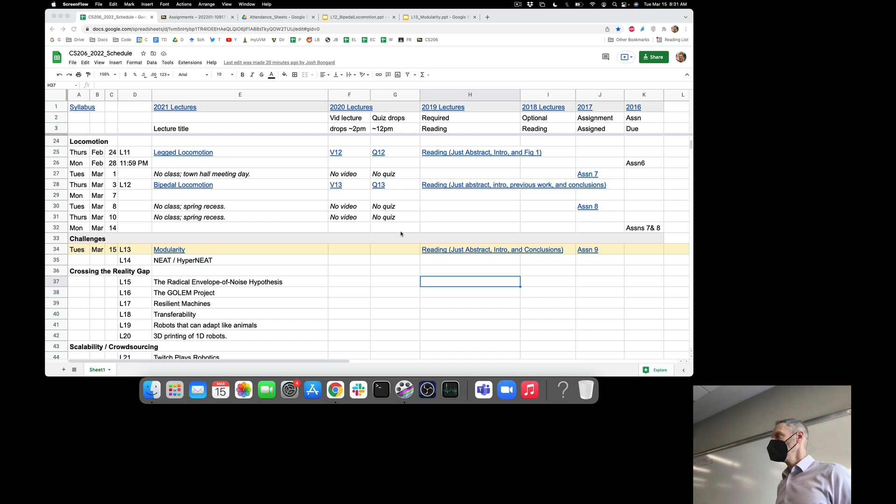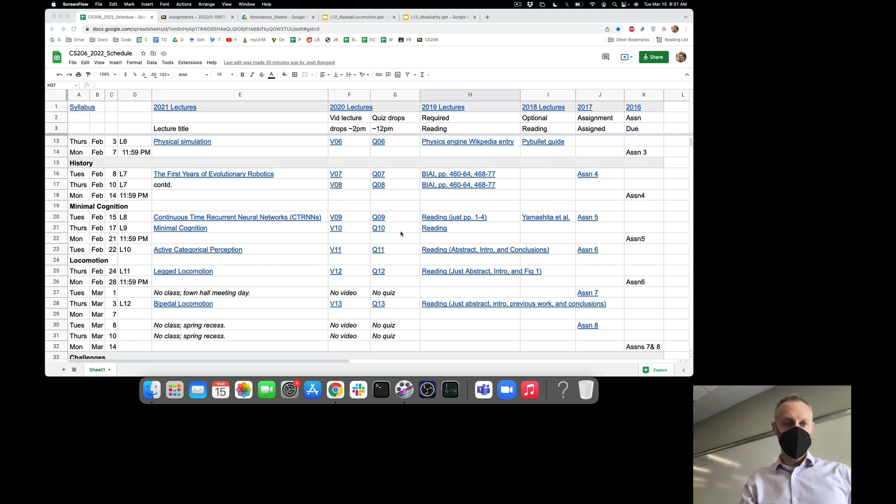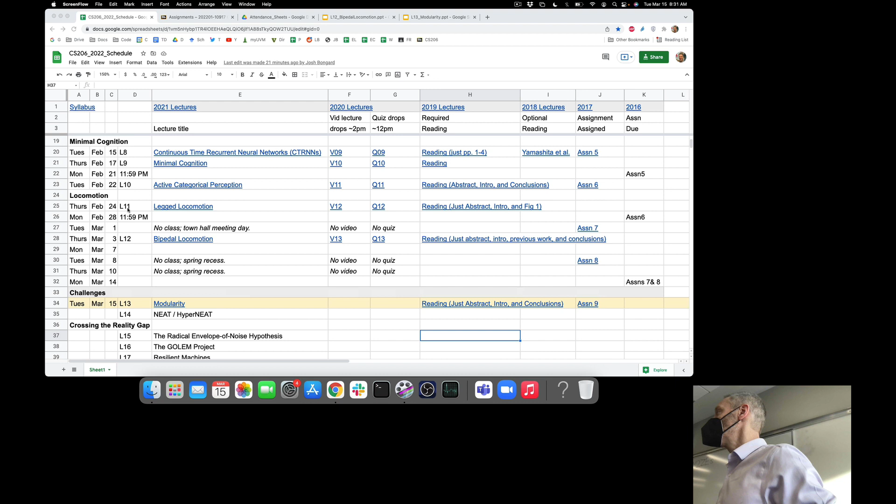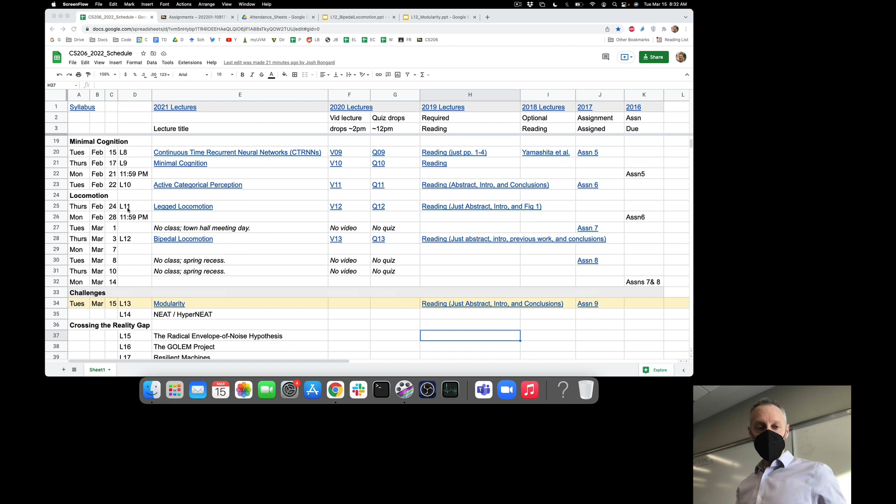We're working our way through, and we're going to finish today our history of evolutionary robotics, admittedly a short history. We've been talking about locomotion, because at least in the animal kingdom, the origins of intelligence are deeply entwined with movement. We talked about Linus's question about why don't plants have brains. Not that plants aren't intelligent, but whatever it is they're doing, they don't seem to need brains because most plants don't need to get from point A to point B. So we're looking at this connection between locomotion and intelligence. We're going to finish that up today, and then move on to where the field is today, and look at some of the major challenges in the field.

One of the nice things about learning about and working in a relatively young field is there are wide open questions, big challenges that no one has a good satisfactory answer to. We will look at some answers that some researchers, myself included, have tried to come up with to address some of the major challenges in creating autonomous and adaptive machines.

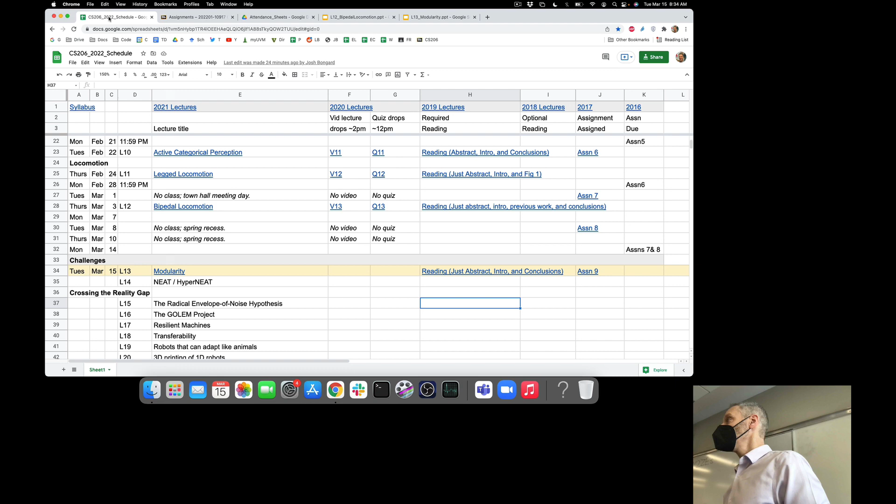All good? Okay, so back to lecture 12, where we're talking about our particular form of bipedal locomotion. Us humans, thanks to evolution, have struck a very extreme trade-off between displacement, energetics, robustness, and balance. It takes us quite a while to figure out the balance part — 2 or 3 years at the outset of life to figure out the balance part of bipedal locomotion. But once we get that figured out, the benefit is what?

We're also not the fastest animals out there. We take a hit in terms of stability and displacement, but we make up for it with energy efficiency. So we started last time by talking about the most energy efficient form of locomotion out there, which is passive dynamic locomotion. We started talking about this experiment last time where the investigators evolved the body of a passive dynamic walker to walk down a decline with basically infinite energy efficiency — no motors, no electronics, no sensors, nothing.

It's kind of hard to see from this picture here, the decline, but if I go back and forth between these two images, you'll see in a moment that there are two phases to this experiment. In phase one, they evolve passive dynamic walking down a decline, and then in phase two, they're going to continue evolution.

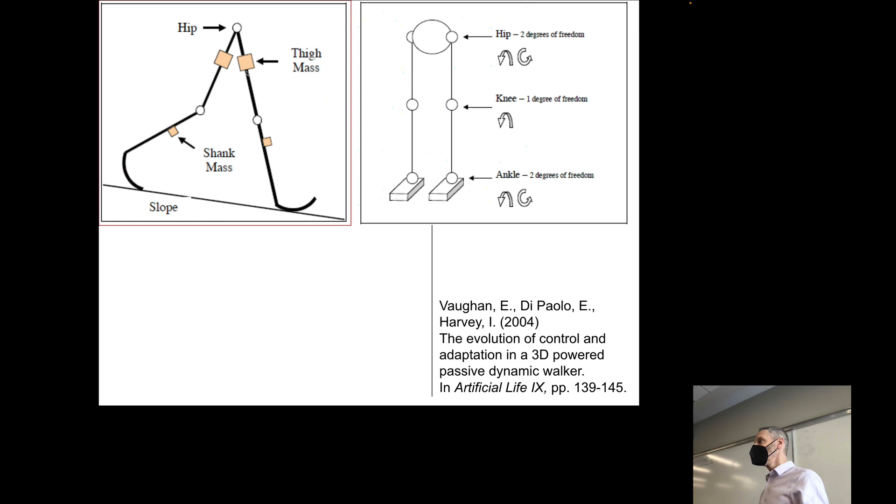In the passive dynamic walker, these are 10 joints but 0 motorized joints, no motors yet. They are going to add on some masses to the robot's body, and evolution is going to play with the position and size of these masses to change the mass distribution of the robot's body. There are masses on the thighs, the shank, the foot, and the hip.

There are some other aspects of the robot's body, in addition to the position and size of these masses, that they're going to subject to the evolutionary algorithm, like the length of the legs, the length of the feet, the radius of the waist, and so on.

The last aspect of the body they're going to evolve is some springs, and I think this is where we ended last time. We spent a little time talking about springs. The simplest way to model a spring is with just 2 numbers: the stiffness of that spring, which you can think of as the thickness of the steel coil, and then damping, which is how much or how little the spring will return to its rest length after you've stopped pulling and pushing on it. Here are my little cartoons of what springs with high stiffness high damping, low stiffness high damping, high stiffness no damping, and low stiffness no damping look like.

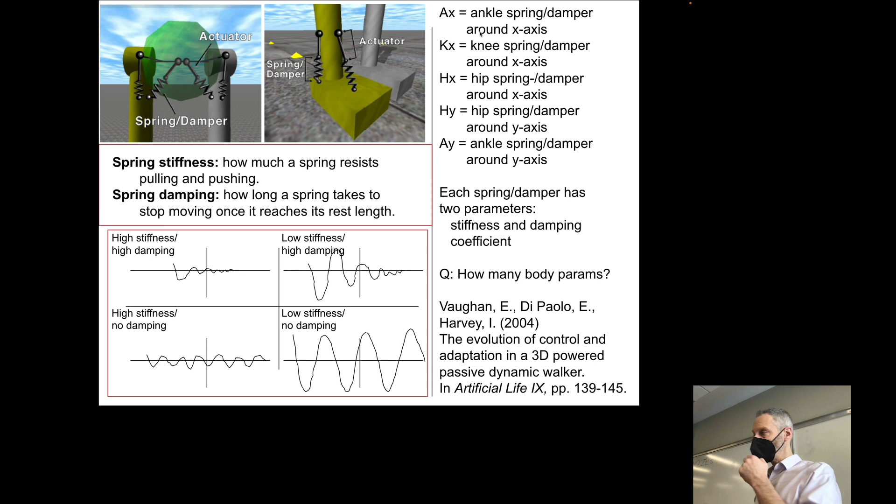We've got 5 springs on each leg: 2 springs at the ankle, 2 springs at the hip, and a 5th spring, not shown here, in the knee.

Okay, so those are all the parameters that we're going to take and put together in a vector and hand that vector over to the evolutionary algorithm. At the moment, your hill climber is evolving a vector that contains numbers, those numbers are synaptic weights. In this case, we have a vector of numbers again, but they're body parameters. How many body parameters are we evolving in total? What's the length of that vector? How many numbers do we have here that we're going to include in this vector?

Not quite. We've got 5 springs, 10 right? So we have the stiffness and damping for each spring, a total of 10 numbers. I forgot to mention, hopefully it's obvious, they're going to assume that this robot is bilaterally symmetric. So whatever the stiffness and damping is for the 2 springs on the left side of the hip, it's the same thing for the right side of the hip. Everything on the left side of the robot's body is the same as everything on the right-hand side. So we've got a total of 10 numbers here. How many numbers do we have here?

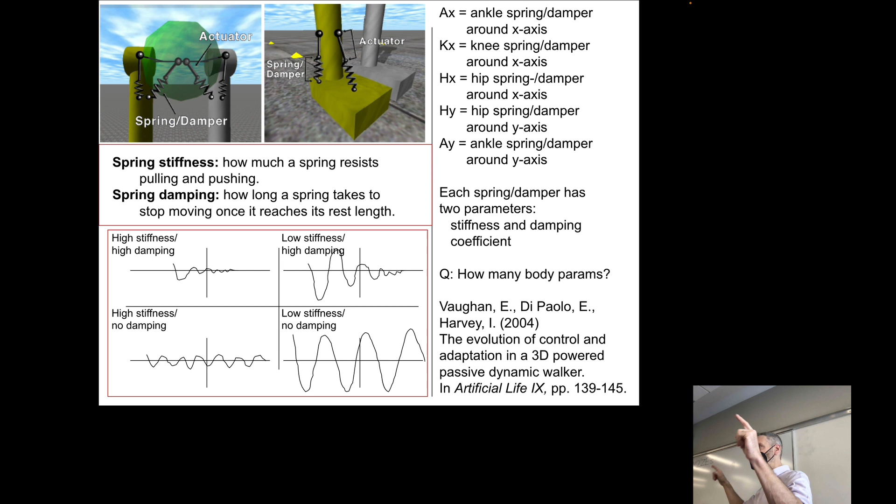12, right? So we've got these 12 body parameters plus these 10 body parameters. So we're going to see in a moment an evolutionary algorithm that's evolving populations of vectors of length 22. Body parameters, no brain yet. So far, so good? Okay.

Okay, there is a little bit of a brain here. There's a little bit of a twist. As we go on through this experiment, we move to hybrid dynamic walking. The robot is gradually going to be controlled more and more by this neural network. It's a bit of a hairball here, but we'll try and untangle it. We're back to working with a continuous time neural network. You'll notice there's no R here.

There are no recurrent connections here. Although now I see some recurrent connections. Okay, maybe it's a CTRNN. Doesn't matter for our purposes.

We've got 5 motors, which we'll see in the second phase. These 5 motors are not attached to the joints, they're attached to the springs. This is actually more biologically realistic than attaching the motors directly to the joints. How so? What biological detail are they folding in by taking motors, connecting them to springs, and springs are pulling on links here, not joints?

Think about your own anatomy. What's the biological detail here? Springs act like muscles, whereas the body acts like the bones. Close. So the body, obviously, the links are the bones. The muscles, the motors, as always, are muscles. What are the springs here? Like ligaments or tendons. Tendons and ligaments, right? Exactly. So your muscles don't pull directly, most of the time they don't pull directly on bone. They pull on springy cartilage, which is tendons or cartilage, which is exactly what gives you part of your energy efficiency, right? We talked about your Achilles tendon and how that contributes to bipedal locomotion.

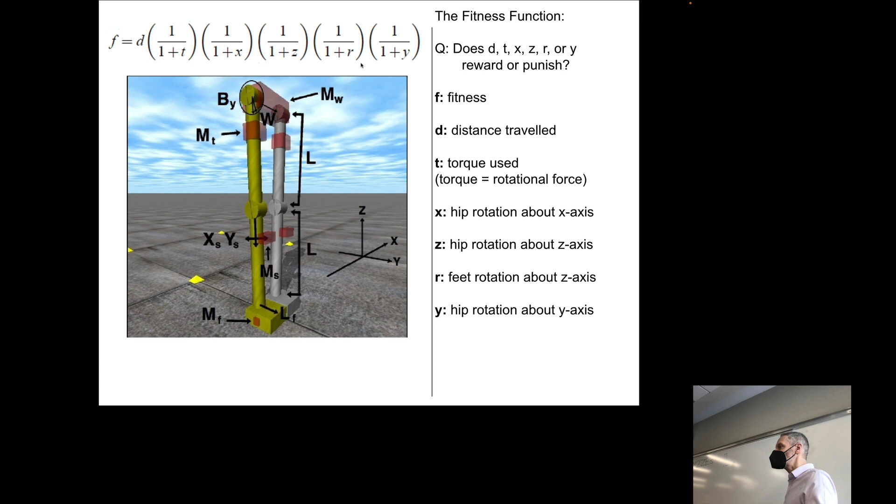I think if you add it, you'd actually be rewarding for, like, if you'd add 1 plus 1 over whatever, it would actually make the fitness go up. If you're adding them, it's not reversing reward and punishment, right? We still want to maximize these 6 terms. We want these 6 terms to be as large as possible. We could just sum them. It's letting the neural network just say it can't care about one and just ignore it. Absolutely, right? So if we sum them, it makes it actually easier for the evolutionary algorithm to ignore some of these terms. Which ones are easier to ignore? And why does multiplying them force the evolutionary algorithm not to ignore them?

I mentioned that we're going to assume that all 6 of these values, d, t, x, z, r, and y, are all positive values. What's their likely range of values? It's kind of hard to say. We haven't introduced actual length units yet. Some of these values might have much narrower ranges than others. Some of them may range between 0 and 10. Some of them may range between 0 and 0.1. It's not really clear from this experiment, but it's probably unlikely that they all have more or less about the same range. T has to do with forces, and D has to do with distances. The rest of them have to do with rotations. Probably going to be very different ranges.

If one of them has a much narrower range than the others, it's easier for evolution to ignore it, right? It makes less of a contribution if we're summing these 6 terms. If we multiply them together, it doesn't matter what their ranges are, they're each going to have an equal impact on this product. Make sense? Okay, just kind of a detail that might be helpful for you in your final project.

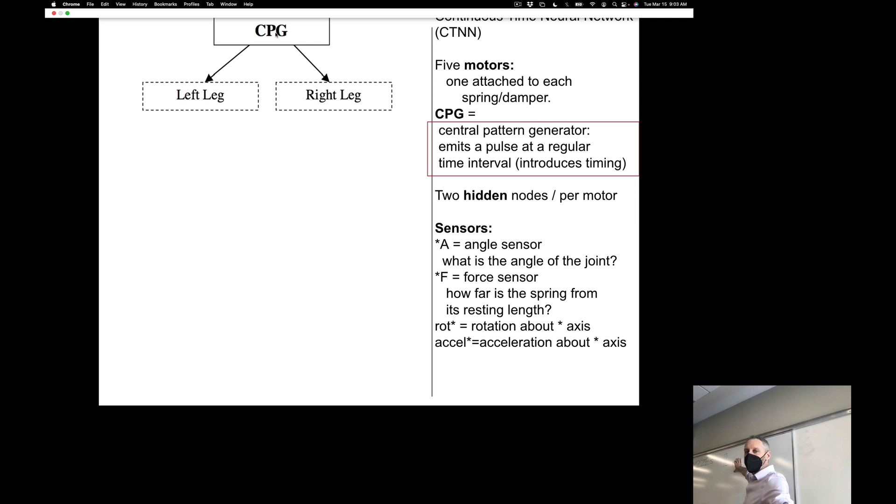So the CPG turns on for a moment. It sends commands, it sends some signal to the motor neurons in the left leg. The left leg moves for just a moment, and then that's it. We're not even going to allow the CPG to send a signal to the right leg. It's going to send a short command to the left leg. The robot's going to jerk for a moment and start falling down the declined plane.

Okay, so that's evolution. So we're evolving these 22 body parameters plus the synapses that connect the CPGs to the motor neurons. During a single simulation, we're going to put the robot at the top of the declined plane. We're going to supply 1 CPG pulse, which is going to cause the left leg to move for a moment. After that pulse, we turn off the network and we record how far down the declined plane it gets and how it gets down the declined plane.

The robot does not start at the top of the declined plane with both feet on the ground like you see here.

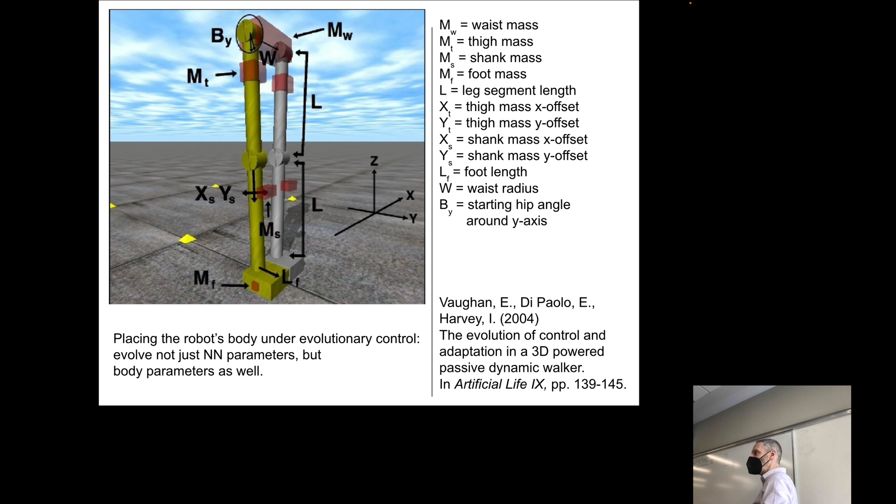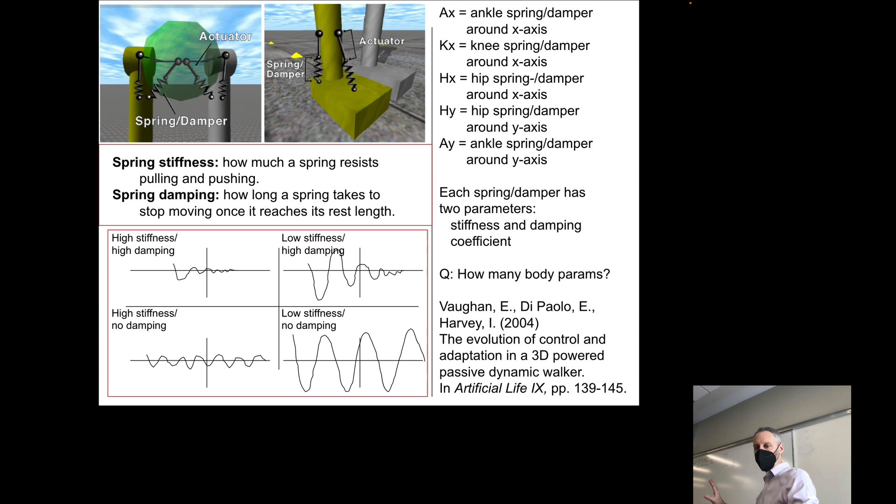A little detail here. If we go back and look at the experiment, one of these is B sub y, the starting hip angle around the y-axis. I think this is a typo, it's supposed to be the starting hip angle around the x-axis. The x-axis points off to the left of the robot, so I think it's the rotation of one of the legs. The evolutionary algorithm is allowed to place the left leg at a particular orientation to start with. It's a detail, maybe it doesn't matter too much, but we're allowing evolution to set the initial conditions for this robot before we start evaluating it.

Okay, so far so good?

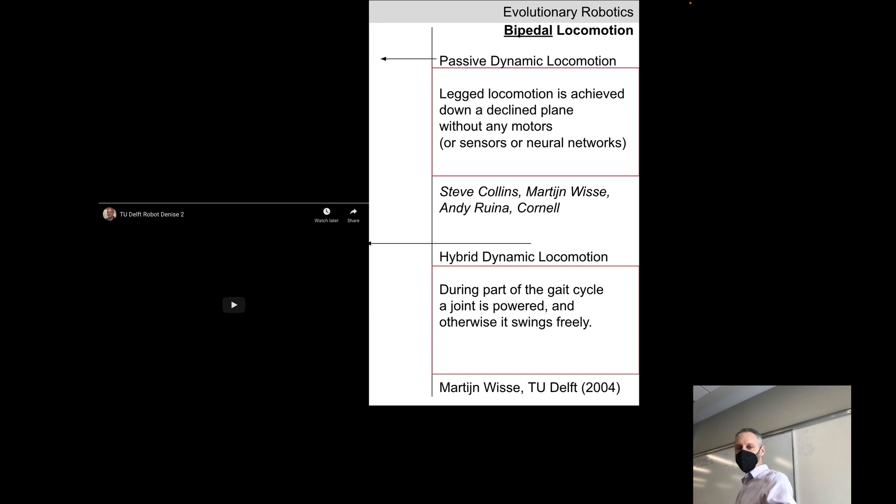Unfortunately this is a bit of an older experiment, and they did not record any videos, which is a shame. You'll have to take the investigators' word for it that they did manage to evolve passive dynamic locomotion down the declined plane. Presumably, it looks something like this—just to refresh your memory of what passive dynamic walking looks like.

Okay, so they evolved, and eventually got a gait that looked something like what you just saw. At that point, they paused the evolutionary algorithm—they didn't stop it—and made a few changes to the experiment: some changes to how the evolutionary algorithm runs, and some changes to how the simulation plays out.

Let's have a look at evolution. Evolution continues as before: they're going to continue evolving the synapses that connect the central pattern generator to the motor neurons, and continue evolving these 22 body parameters. But they're going to multiply this product by another multiplicand, which is 1 over 1 plus v, where v is the difference in velocity between the way the robot moves in the passive gait and the way it moves in the hybrid gait. So they're going to play back this genome, which contains synapses connecting CPG to motor neurons and these 22 body parameters.

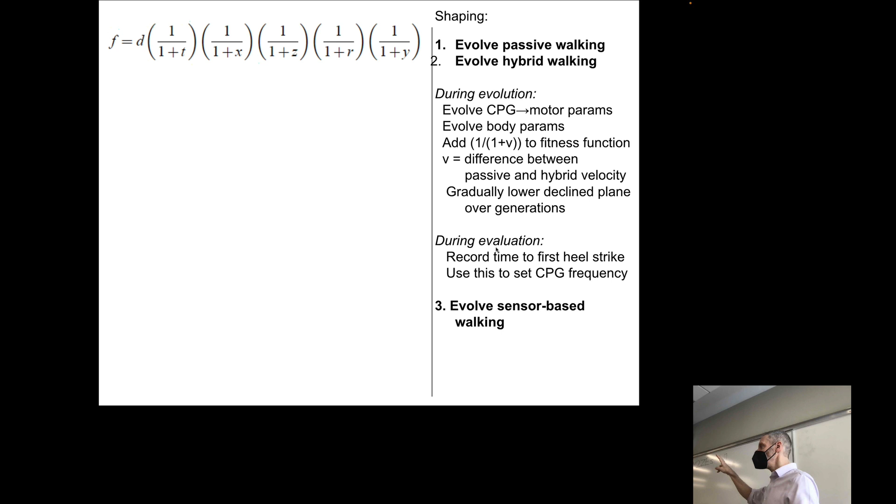They're going to play it back in the simulation twice, two different ways. The first way you just saw in phase 1: the robot gets one pulse, and then it moves down the declined plane. When they run the robot in hybrid mode, they send one pulse of the CPG to the left leg. The left leg gives a bit of a jerk, the robot starts to fall forward, and the simulation times the amount of time it takes until the left heel strikes the ground.

And this amount of time sets the frequency of the CPG. In most adult humans, our CPGs run at about 1 hertz. Very young children learning to walk take lots of short, fast steps—they have a different frequency for their CPG. Chickens have another one, and so on. So we don't know what the frequency for the CPG should be for this robot.

We also don't know what the CPG frequency should be for different instances of this robot. Remember, we're evolving these body parameters—some of them have large L, some are very tall, some have low L, some are very short. We want the body itself to dictate the frequency of the CPG.

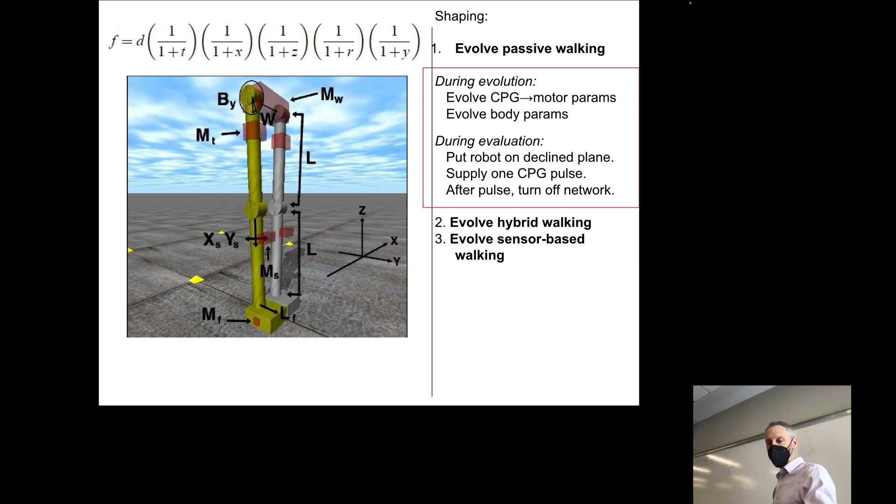Make sense? So for each robot, we're recording the time until first heel strike, and at that point we send a pulse to the other leg—left leg, then right leg. Now we have our frequency. So at the next T, the CPG gives another pulse to the left leg, right leg, and so on. Now we have the hybrid dynamic walker.

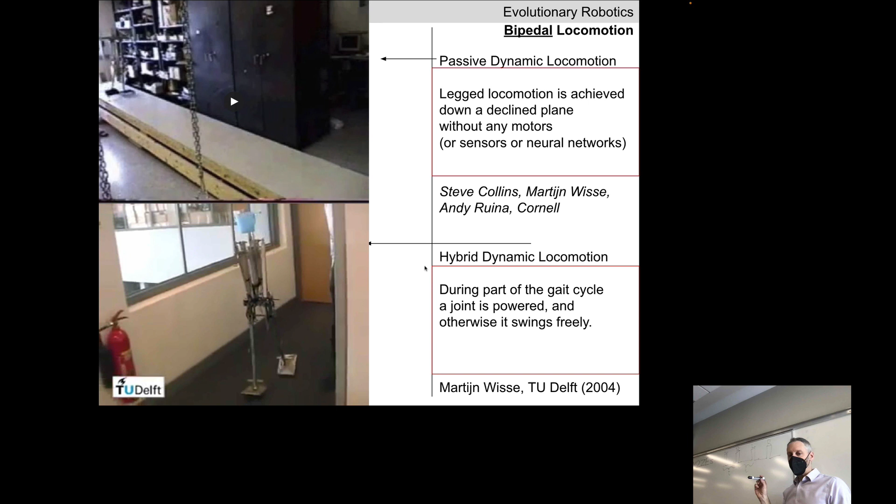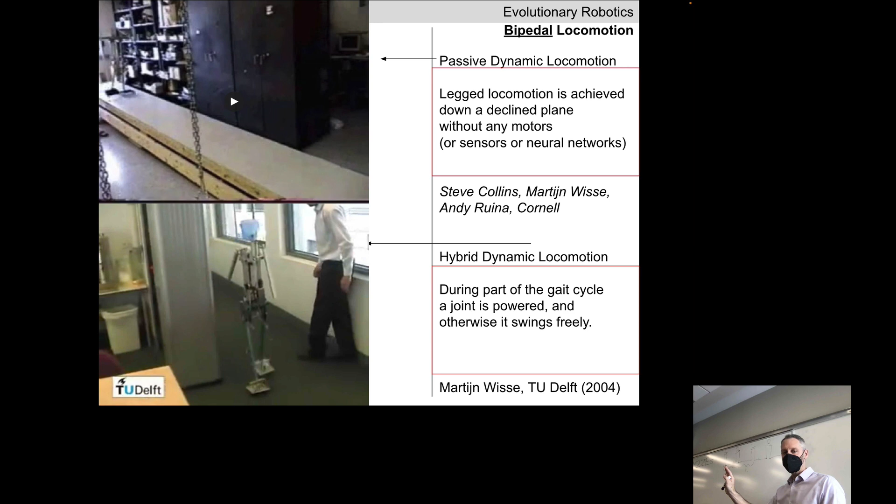Again, just to remind you what that looks like, here's Denise, the hybrid dynamic walker, where the motor gives a bit of an impulse force just as the stance foot—the one at the back—leaves the ground, giving Denise a little push forward, and then the swing leg goes passive again.

You can think about taking a given robot and evaluating it in two different ways: with passive dynamics or with a hybrid dynamic approach. For every genome, they evaluate it on the decline plane in passive mode, then evaluate it again in hybrid mode, and compute V, which is the change in frequency, or the difference in velocity of the robot moving down the decline plane between the passive and hybrid modes. We're trying to minimize V.

We're adding in this term, 1 over 1 plus V, and trying to minimize V — the difference in the velocities of the passive dynamic walker and the hybrid dynamic walker. So far, so good?

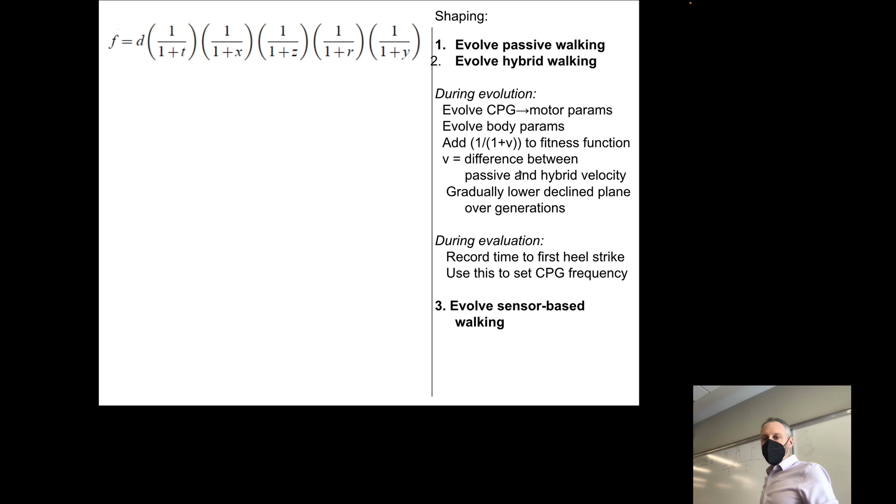The other difference we're going to make is that as we continue the evolutionary algorithm, we're going to gradually lower the declined plane, and keep measuring the difference between the robot doing passive dynamic walking down the declined plane and hybrid walking on this increasingly lower declined plane.

What is this strategy of gradually decreasing the declined plane? We've seen that strategy several times before. It's actually relatively easy to walk down a declined plane in hybrid mode. It gets harder and harder to walk in hybrid mode as you have to walk on increasingly level ground.

So instead of just dropping the declined plane all the way to horizontal in the second phase, we're going to gradually lower it. What is this strategy? We've seen it a few times now in this course: if something is difficult for the learner, or the evolver in this case, we gradually make things more difficult. Or we start things off easy and then gradually increase difficulty.

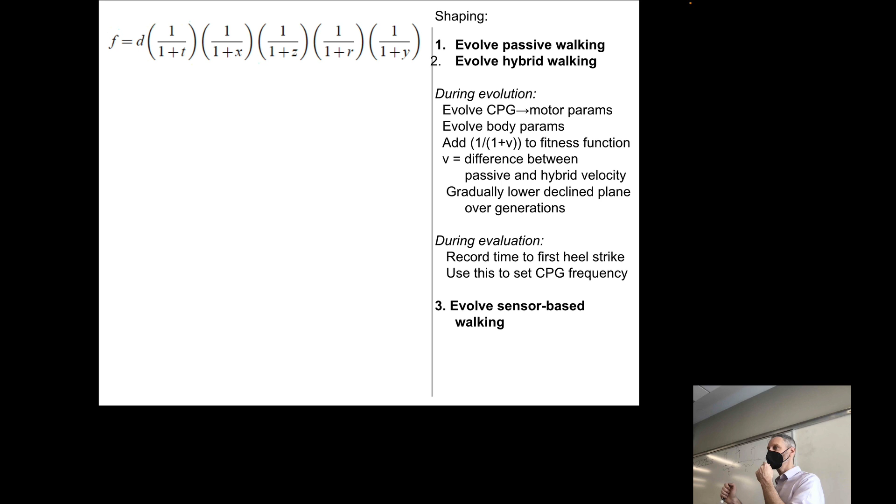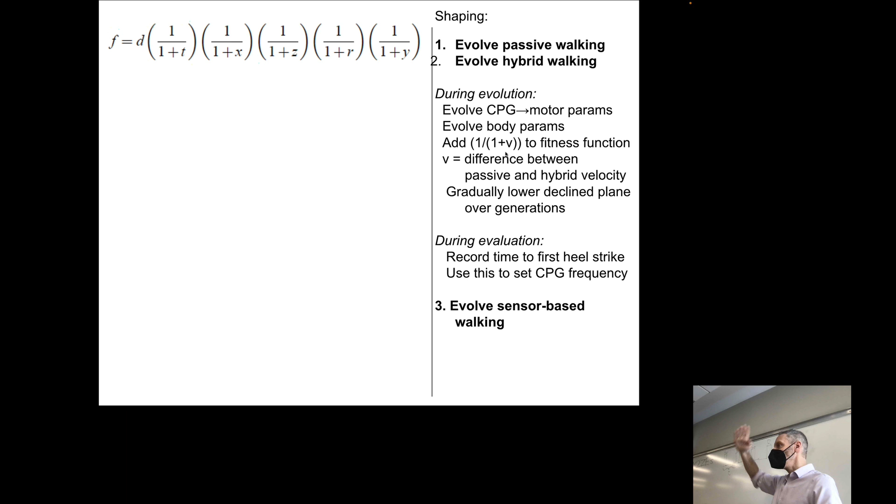Scaffolding, right? The training wheels on the bicycle. We've seen this a few times now. Over this second phase, the declined plane is getting lower and lower, and the evolving robots are increasingly challenged to exhibit passive dynamic walking when on the declined plane, and to exhibit hybrid dynamic walking when on an increasingly flat declined plane. Make sense?

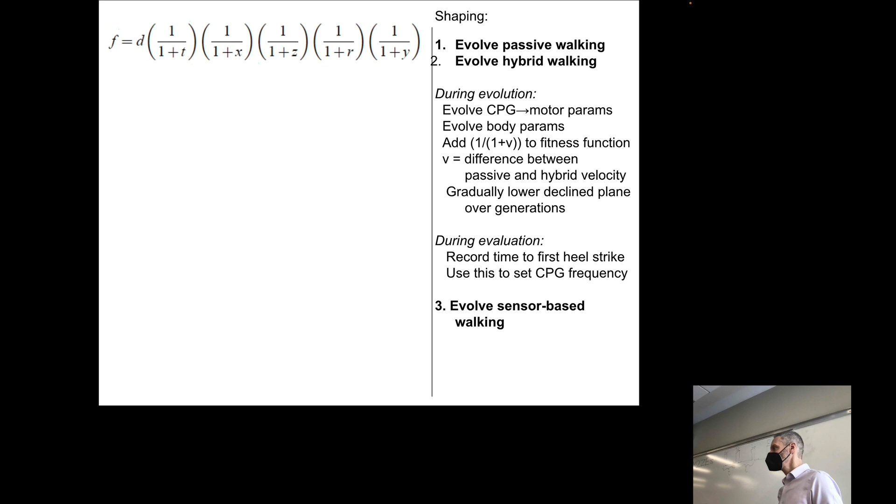Again, unfortunately, no videos — you'll have to take my word for it that at the end of this second phase, they now have some version of this robot walking more or less like Denise, the hybrid dynamic walker, on flat ground.

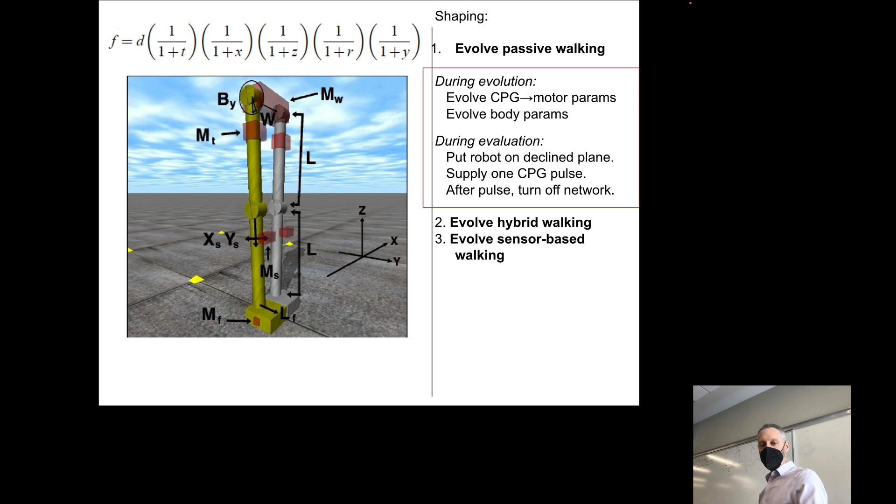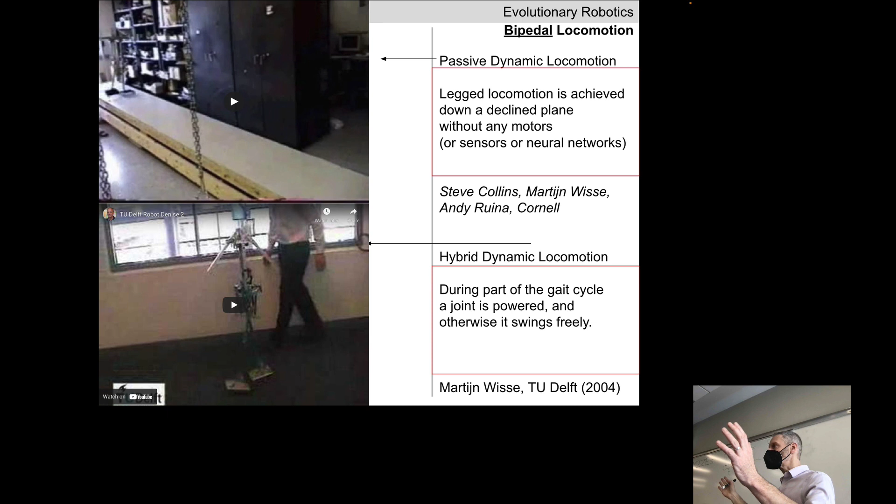As I mentioned before when talking about Denise and the passive dynamic walker, it took roboticists months and months to get the details of these mechanics just right. Here's an example of where evolutionary robotics is useful. We've broadened the evolutionary algorithm to tinker with both body and brain, so we as designers can take a step back. We don't have to determine the exact curvature on the feet of the robot — all we need to do is tell it generally what we're looking for and what we're not looking for. It makes the job of the designer a little easier.

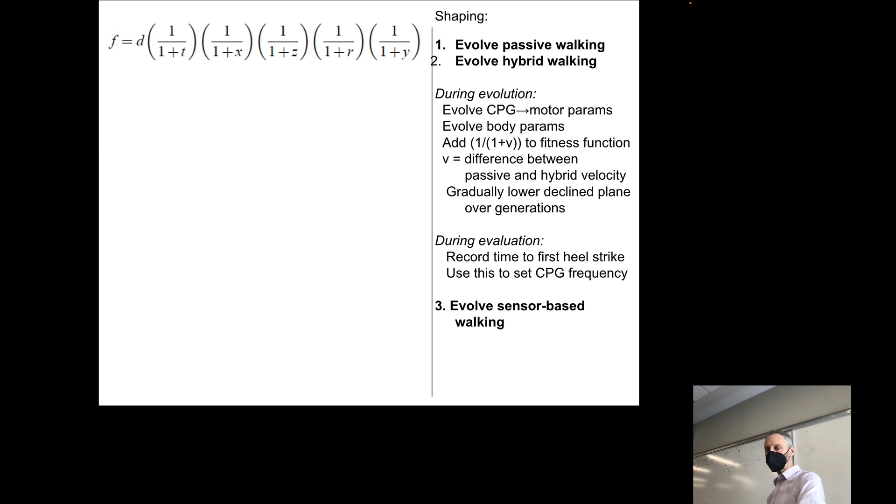This is the experiment that just keeps on going. Once they had hybrid dynamic walking, they still weren't satisfied, because this robot, although energy efficient, isn't very robust. It wouldn't be able to deal with rough terrain or anything else that happens, because it has no sensors — it's completely blind. So they're going to pause evolution again, make a few changes, and then turn the evolutionary algorithm back on, and now evolve sensor-based hybrid dynamic walking.

How does that work? They're going to turn on all the rest of the network that was currently hidden — all the synaptic pathways that go from the sensors all the way through to the motor neurons. I'll back up for a moment: remember we have all the synapses that flow from the CPGs to the hiddens to the motors. Now we're going to turn on all of these synapses.

And we're going to start by setting all of those synapses with weights that are very, very close to zero. Why? Why not just add them into the genome with values between -1 and +1? Why add them into the genome, tack them onto the end of this vector, with values that are very close to zero?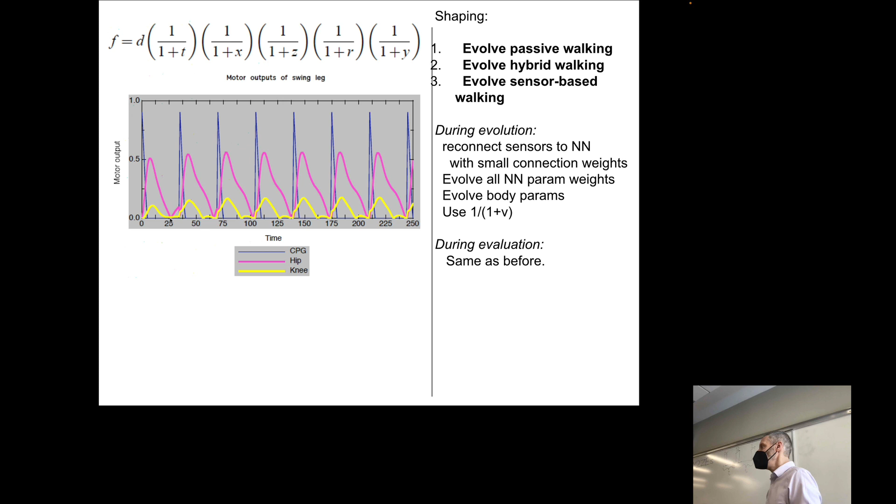In the case of the knee, it's a little bit more efficient. In yellow here, there's a motor pulling on the spring at the knee with maximum force at time step 10, then letting go by about time step 20. You'll notice this flat in the yellow between time step 20 and time step 37, so the motor has stopped pulling on the knee. The knee is completely passive during this period. So we can see some hybridicity here - some actuation and some passive dynamics.

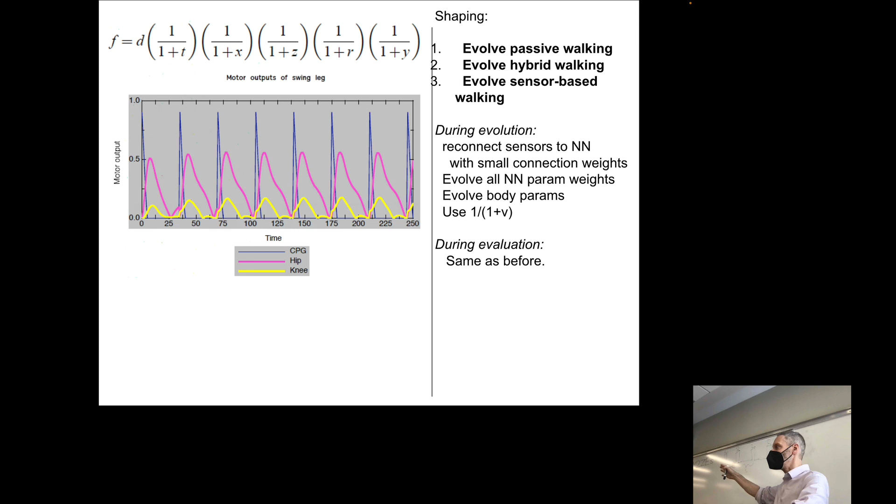Okay, phase 4 - this is the experiment that just keeps on going. They were particularly successful. At the end of phase 3, they have a robot that can exhibit hybrid dynamic walking. It's somehow this walking is being modulated by the sensors. Can't see from this picture how that's happening, but we can assume that it is.

Phase 4 here, they're now going to continue evolving as they did before. They're not going to make any change to the evolution, but they are going to make a change during the simulation - as the hybrid dynamic walker walks on flat ground, they're going to introduce wind, applying small external perturbations that push on the robot, and evolve the ability for the robot to keep moving in the presence of wind.

At the end of phase 4, they now have a robot that is robust to increasing forces of external perturbations. Again, there's no units here, so it's not clear how strong these external perturbations are, but up to 4 here, the robot does exactly what it did in the presence of no wind. As things get windier, this particular evolved robot starts to move more erratically, and after a while it only takes 5 or less steps before falling over.

Okay, in this fourth phase here, by evolving the robot in windy conditions, they're slightly altering, or forcing evolution to alter, the trade-off that these robots make between the four competing factors in locomotion. How is it forcing evolution to change that trade-off?

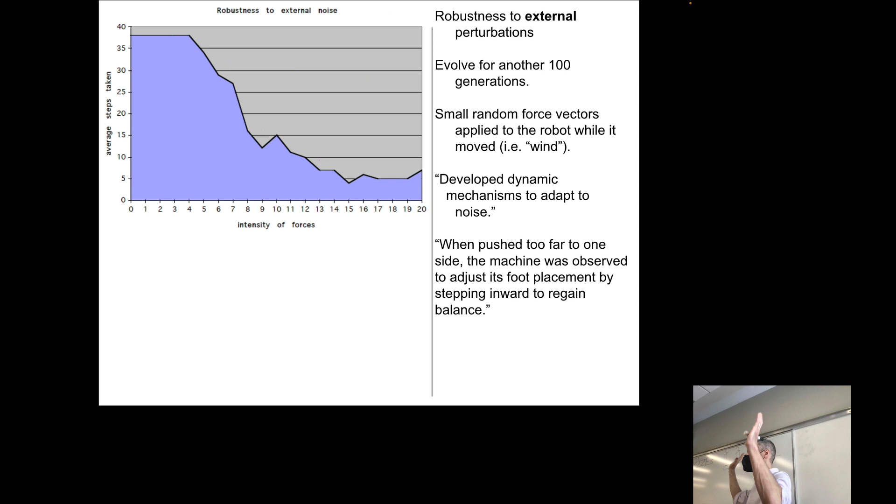It makes it momentarily have to prioritize stability. Remember Big Dog getting kicked in the side? Big Dog has to sense that a change occurred. So this robot and Big Dog both have to use their sensors to know: I am now falling, and if I don't do something in the next 2 milliseconds, I'm in real trouble.

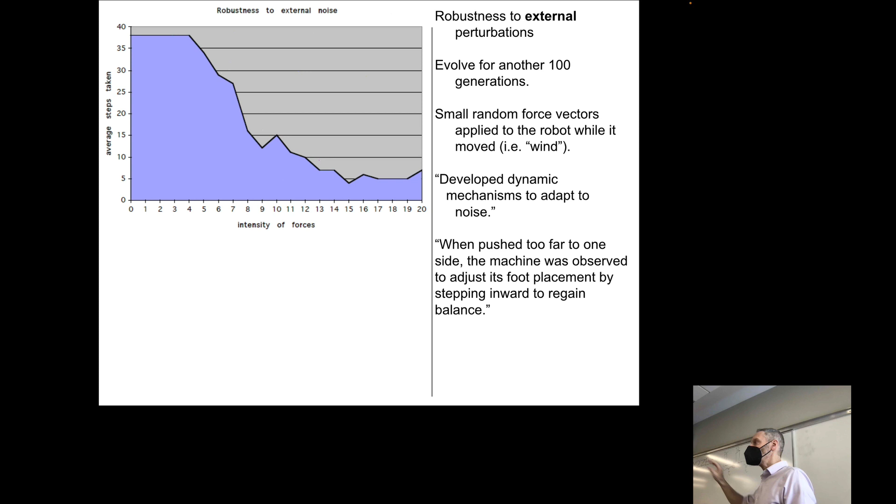So in phase 4 here, the robot is learning to be more stable and more robust. It's able to continue walking in windy conditions. We're actually moving towards a gait which is more stable and more robust. And as always, we're going to have to pay a cost somewhere with these other trade-offs. How does this robot pay for this ability to become more robust and more stable?

Again, I don't have a video to show you. When you walk in very windy conditions, what cost are you paying to keep upright and keep going? You slow down. Yeah, that's one strategy. You can't slow down too much though, or else you'll never get where you're going.

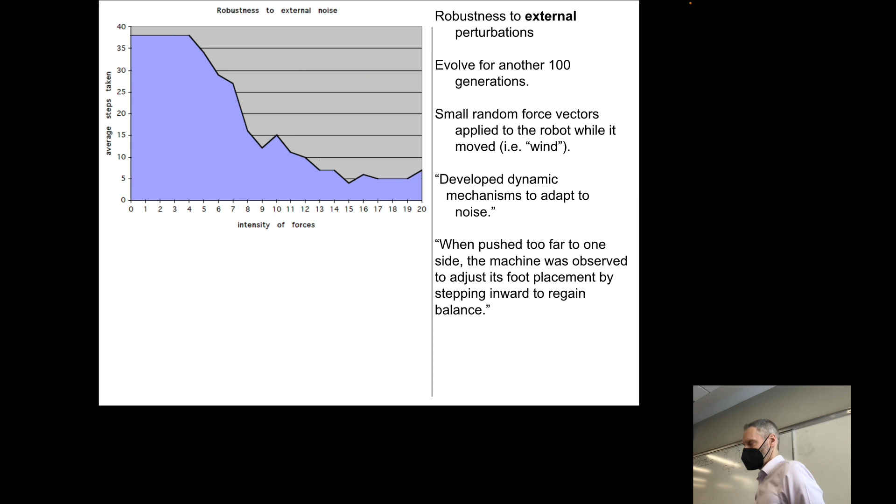What would be the rotation of joints? The rotation of joints here has to change, right? You have to modify your gait somehow, which means... energy. Absolutely, right? You have to use more energy.

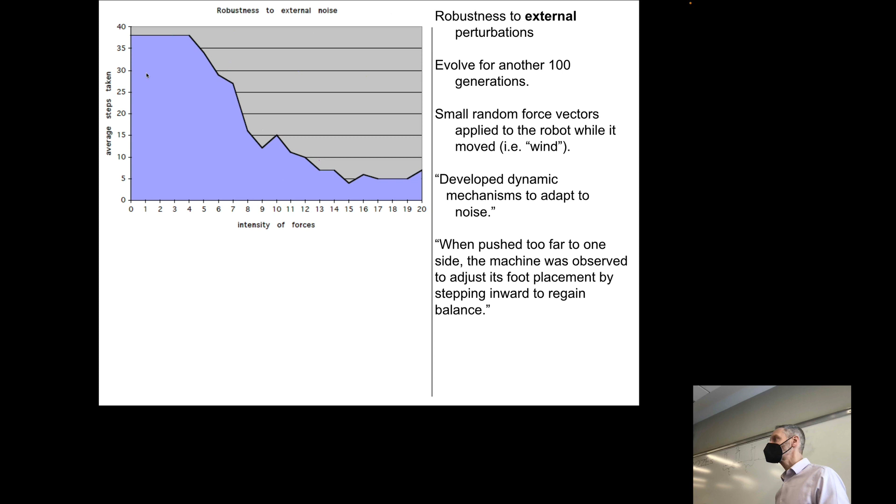Energy efficiency is great. If everything is stable and exactly the same, you can actually tune your hybrid dynamic walking to be very, very passive. But when things change, you've got to change the rotation of your joints, which means your motors have to do different things, which means the motors need to know how to change in response to sensors, which means you've got to pay a bit more in terms of energy. And you need to get a little smarter.

When Big Dog was kicked, or when you're kicked, or when you trip, or when you miss a step on a stair, there's basically an infinite number of ways you could send commands to your motors over the next 2 or 3 milliseconds. And a vanishingly small subset of those commands are commands that are going to rescue your fall. This is one of the places where intelligence starts to creep in.

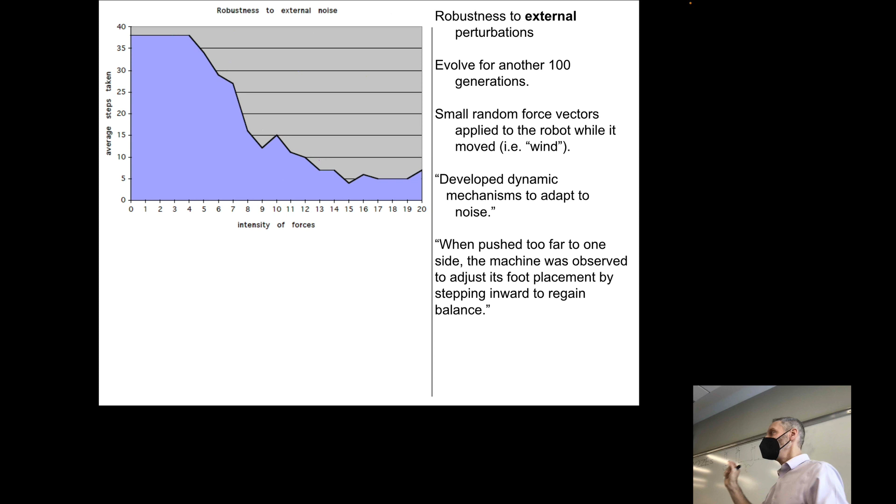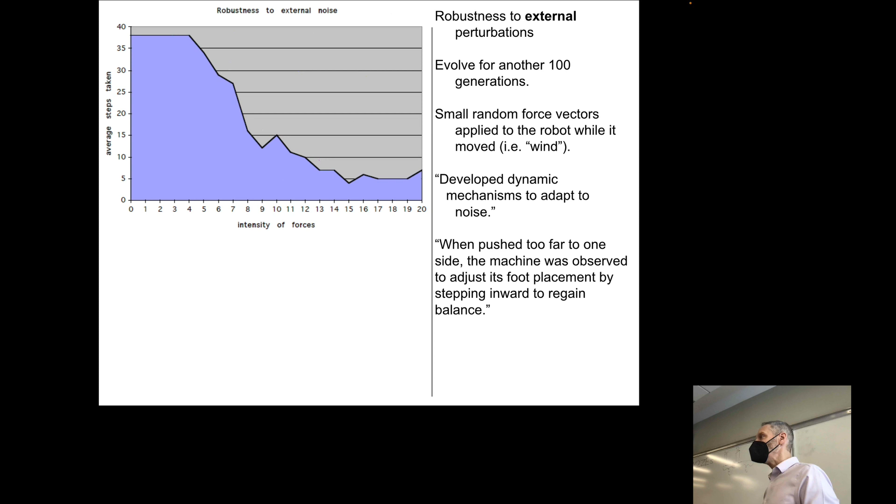If you need to get from point A to point B, especially in a complex world, it is not a trivial matter to do so. You have to very quickly choose the right strategy among an infinite number of wrong strategies, possibly dangerous, possibly life-threatening. This is the point at which we start to move from a discussion of locomotion into a discussion of intelligence.

You can understand why the experimenters would want to evolve robots that can deal with windy conditions or walking down inclined planes or flat ground. Why would you bother doing this? Why evolve robots that are robust to internal perturbations, manufacturing errors? Seems weird. What's the utility in this?

Well, it's like we have genetic mutations that slightly change the way our bodies work or grow or develop. So maybe they were trying to see if the same network could adapt to mutations. Absolutely, right? No two bodies are exactly the same. So whatever strategy we have to learn the biomechanics of bipedal locomotion, it should be robust to different bodies. So maybe they're testing some biological hypotheses here.

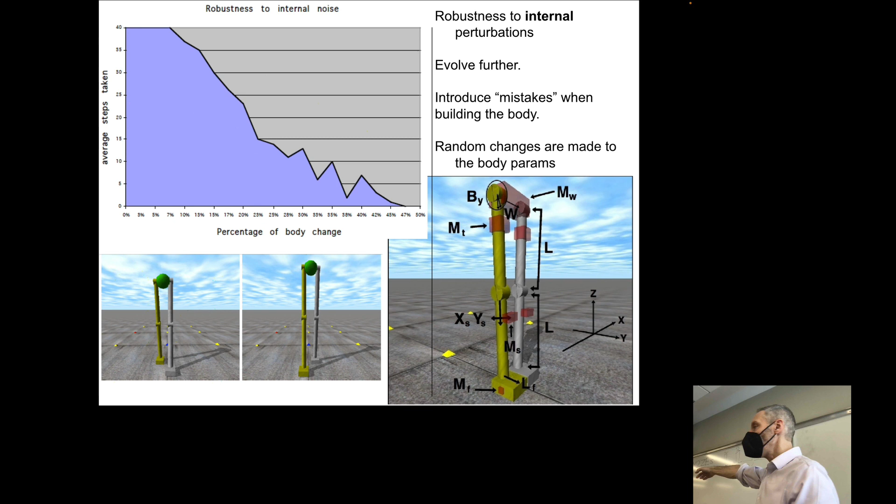If we build a physical version of any one of these in silico robots, there are going to be differences between the physical version and the simulated version. We can be proactive and prepare for those differences by evolving robots that are robust to internal perturbations.

So here we go. They evolve, and at the end of phase 5, they take the best robot, the one with the highest value of F. They play back that robot over and over in hybrid mode on flat ground, but now introduce increasing percentages of manufacturing mistakes. You'll notice that up until maybe 15%, the robot's still taking 30 steps. That's pretty good. Manufacturing mistakes of 15%, that's a pretty crappy 3D printer.

Okay, they ended evolution at this point. The last part of this experiment, just for fun, is they took that best robot from the end of phase 5. It's robust to passive and hybrid walking, robust to inclined planes, flat ground, robust to no wind and some wind, robust to no manufacturing error and some manufacturing error. And they introduced one more curveball to this one evolved robot, which was to tune up or tune down the frequency of the CPG.

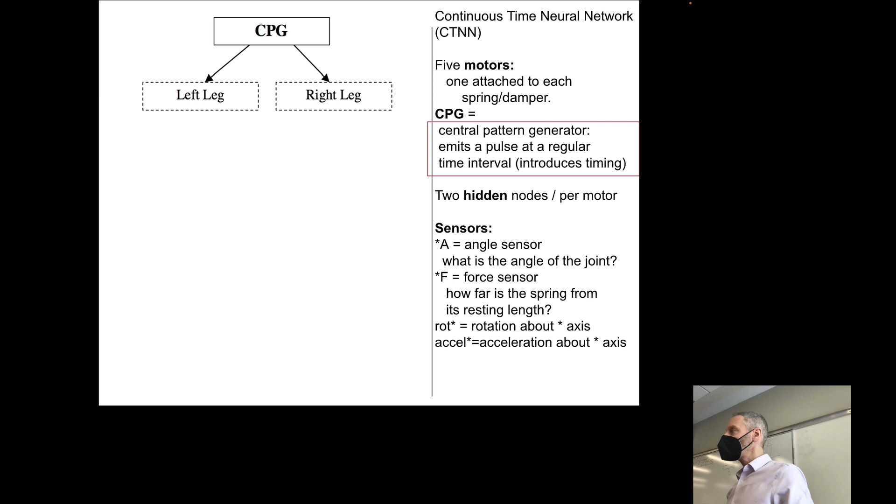How? Would the angle of the slope have something to do with it? If it's like a downhill, your strides would be longer, and uphill your strides would be shorter. Maybe. Think about all the adventures that this robot has gone on at this point. This particular robot with these 22 body parameters and these synaptic weights may never have actually existed in phase 1 - maybe only its great-great-great-great-grandparent did.

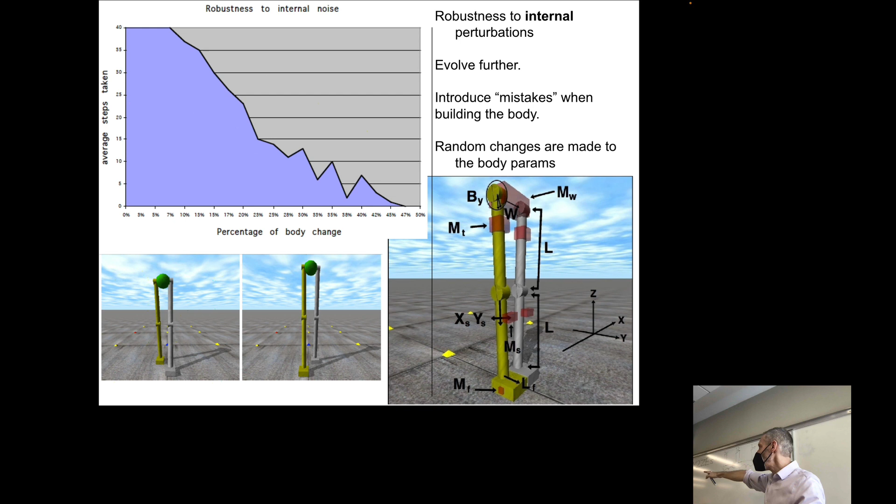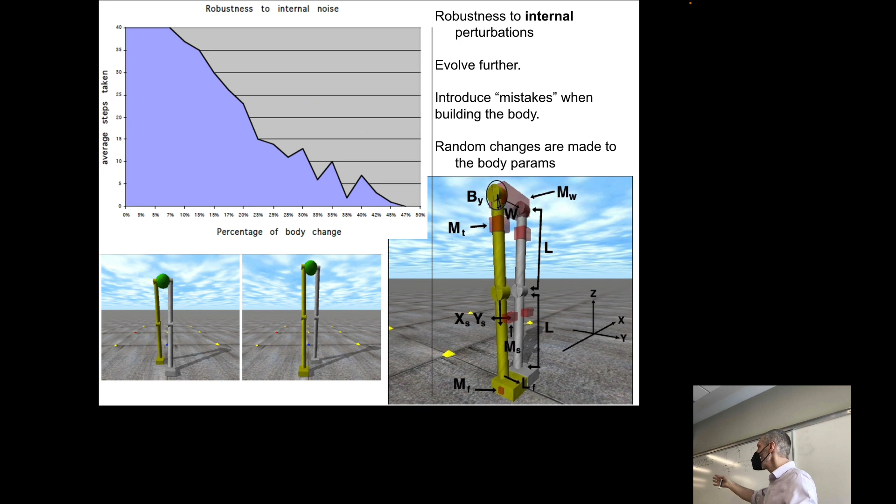If you think about the ancestors of this robot, the ancestors had different bodies, they experienced different environments, they had different synaptic weights, they had different brains, but they all survived in their niche for long enough to produce offspring, which also survived in their niche to produce this particular robot at the end.

So this robot is a twig on probably a tree that goes all the way back to the very first phase of this experiment. And we need to think not so much just about this robot, but the robot's parent or parents, depending on whether they used recombination, grandparents, great-grandparents. Indirectly, this robot has inherited the robustness of all of its ancestors in the same way that we all have.

None of us obviously have experienced the breadth of experiences that all our ancestors have. Even though we didn't directly inherit those experiences, there's something in our DNA, or the DNA of our families or our ancestors, that made us particularly robust to perturbations.

The reason we're spending a few minutes talking about this is, again, we're transitioning now from a discussion of the nuts and bolts and biomechanics of locomotion to intelligence. We now have a robot that is robust to changes in its environment. It knows, quote unquote, what to do when the environment changes, possibly the external environment like wind, or the internal environment like changes to a CPG.

And it inherited that robustness because its parents were robust and its grandparents were robust and so on. So this robot somehow seems able to take on new challenges that none of its ancestors ever saw.

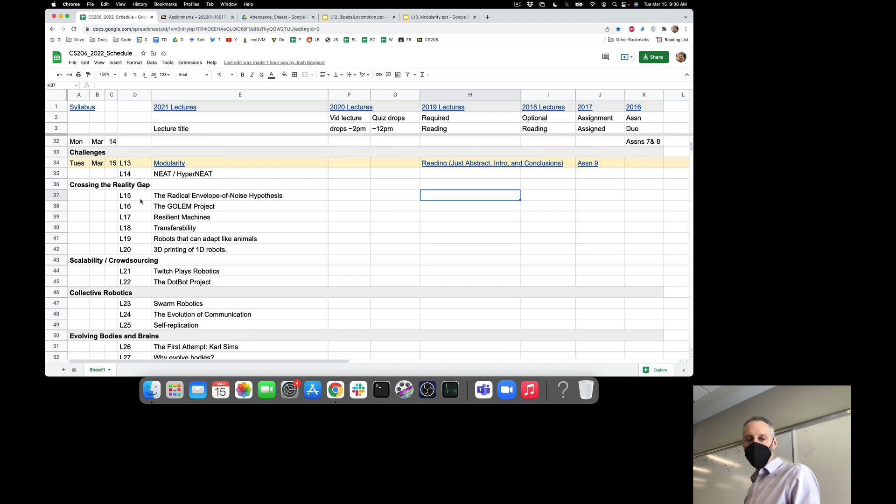No? Okay, so challenges. We're going to spend the next lectures, 13 through 25, looking mostly at questions, and we're going to look at partial solutions. People have had some answers or attempts to solve these problems, but all of the problems that we're going to talk about here are still unsolved.

We'll spend the last 9 minutes of class today talking about the open problem of modularity. Think about the neural network we just saw in that biped. It's basically a ball of spaghetti. Everything is wired up to everything else.

If you allow your evolutionary algorithm to not just tune synaptic weights, but actually add and remove synapses, what an evolutionary algorithm will always tend to do is add more and more synapses, making a neural network less and less modular over time.

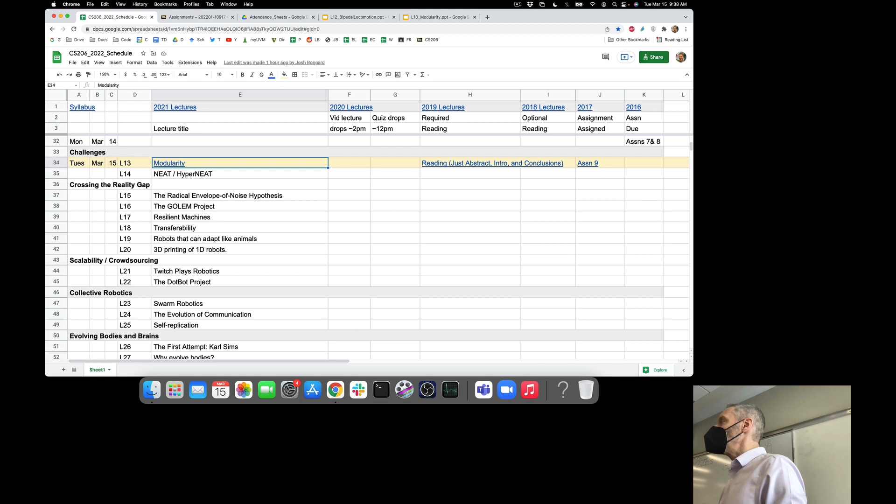Your brains, your central and peripheral nervous systems, are very modular. Every neuron in your brain is not connected to every other neuron in your brain. It's connected on average to about 10,000 other neurons. Sounds like a lot, but given the total number of neurons in your brain, our brains are quite modular and quite sparse. Not everything is connected to everything else.

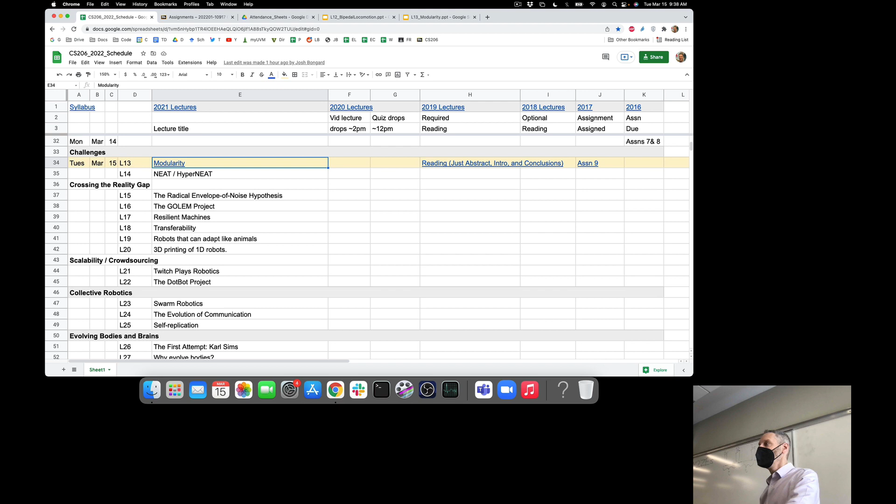When we evolve neural networks, or in machine learning it's called neural architecture search, when you're searching for a good neural architecture, they tend to become less modular over time. Evolution or machine learning tends to paint itself into a corner. It makes things less and less modular, which makes it harder to make changes to that system. If you have a very non-modular system, you make some change at some place, that change propagates everywhere, and the machine typically breaks. We'll talk about that today.

Next time we'll talk about a very famous pair of algorithms in this field, NEAT and HyperNEAT, which are actually partial solutions to a problem we haven't talked about yet. We'll talk about that in lecture 14.

As promised, we're going to spend 6 lectures talking about crossing the reality gap. We evolve simulated robots, we build them in reality, and they don't do anything close to what we saw in simulation. How do we cross the sim-to-real gap?

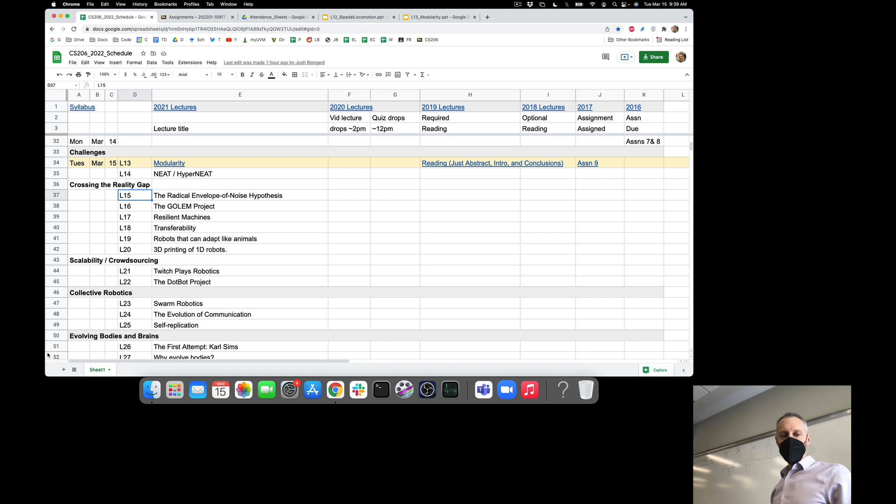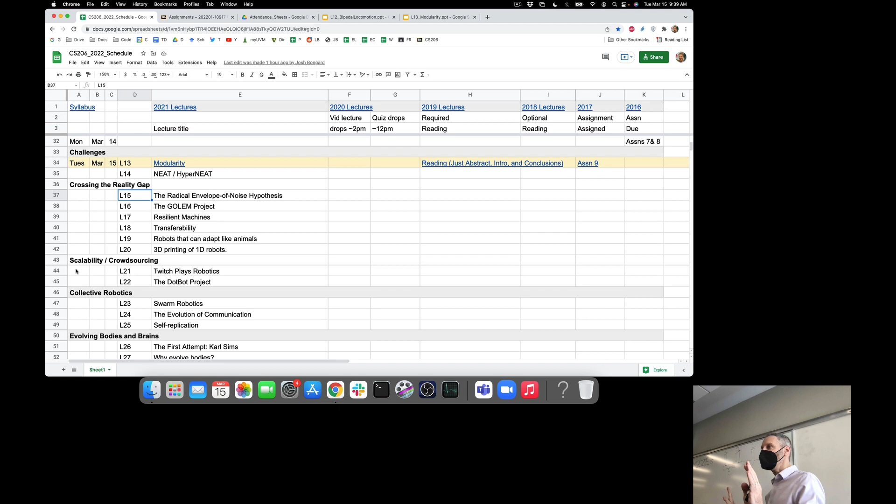We'll spend 2 lectures talking about how to try and scale up evolutionary robotics. For all of you, there's going to be one researcher that makes one evolutionary robotics experiment over 3 or 4 weeks, posts a video on YouTube, and that'll be the end of it. How do we start to do evolutionary robotics experiments with populations not of hundreds of robots, but millions?

We have thousands of fitness functions, thousands of participants coming up with fitness functions and tuning them. If we want robots that are practically useful in the real world, we're going to have to get away from these toy experiments of one person tinkering with one fitness function that evolves one type of robot.

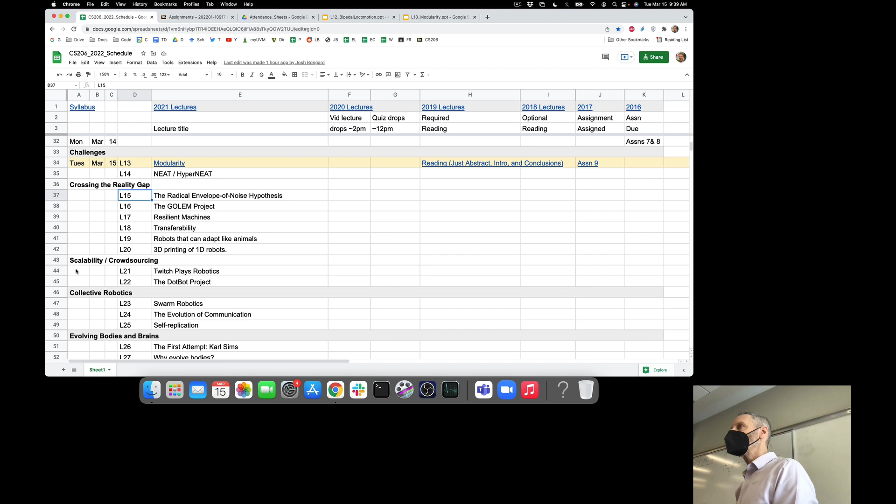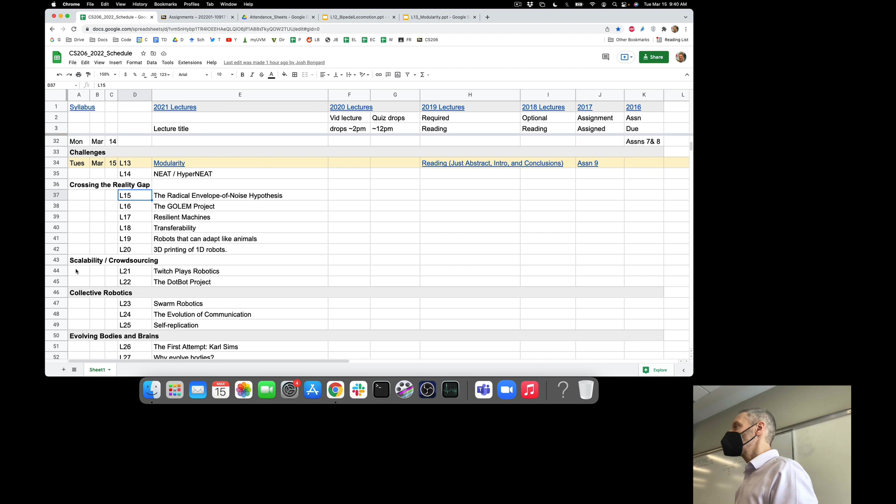An obvious solution for doing this is crowdsourcing. How do we open up evolutionary robotics to the crowd so everybody can participate in trying to deflect an evolutionary algorithm towards good robots and away from dangerous robots?

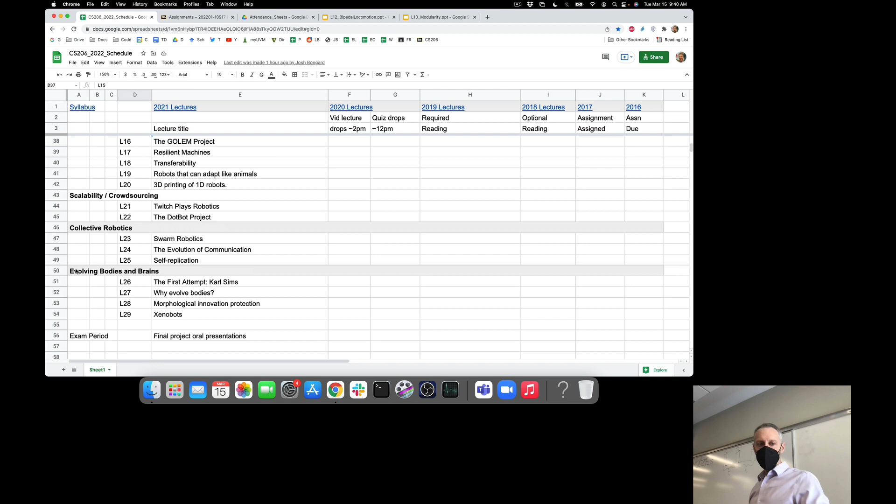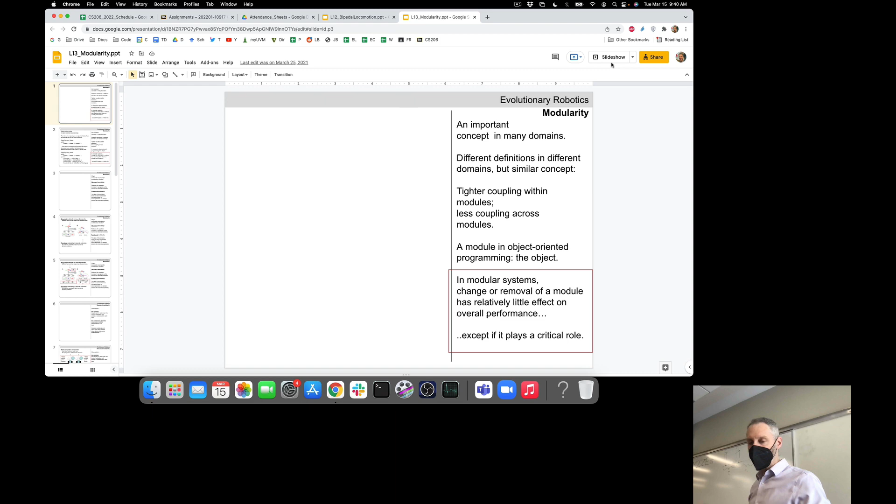We'll then talk about that, which will finish our discussion of open challenges. So that's an overview of where we're going. Let's start with modularity. We've got 5 minutes left, so we'll introduce the problem and talk about the solution next time.

Modularity is ubiquitous in engineering. If you were to ask an engineer what is the most important rule in building or making something, an engineer who's paying attention should probably give you back the answer of modularity, otherwise known as divide and conquer.

It comes up in lots of different domains, with very different concepts and terminology, but the basic idea tends to always be the same. You have components or modules, with tight coupling within a module and less or no coupling between modules. You open up your computer, there's the memory module, there's the CPU. You open the hood of your car, there's the engine, the muffler, the brakes, and so on. It's everywhere in everything humans make, including software.

You just did a fair bit of object-oriented programming and refactoring. What you were doing, hopefully successfully, was creating modules that correspond to the basic concepts in evolutionary robotics: robot, solution, optimization, body, brain, neurons, synapses, and so on.

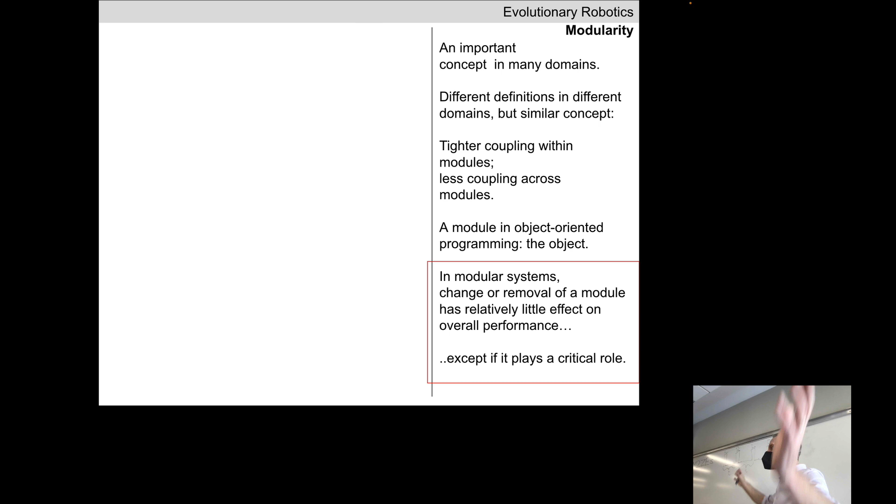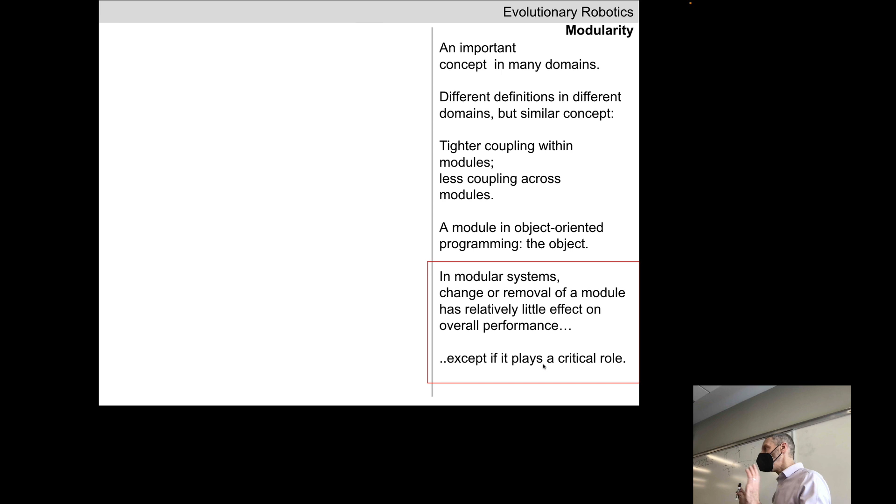Why do we want modularity? Because as we design a series of machines that get better and better, if we change or remove a module, we want that to have little effect on the whole thing. If a change to your code causes changes on almost every line, you're never going to debug that code. With the proviso that some modules tend to be more important than others — even in a modular system, tinkering with a critical component can often have global effects.

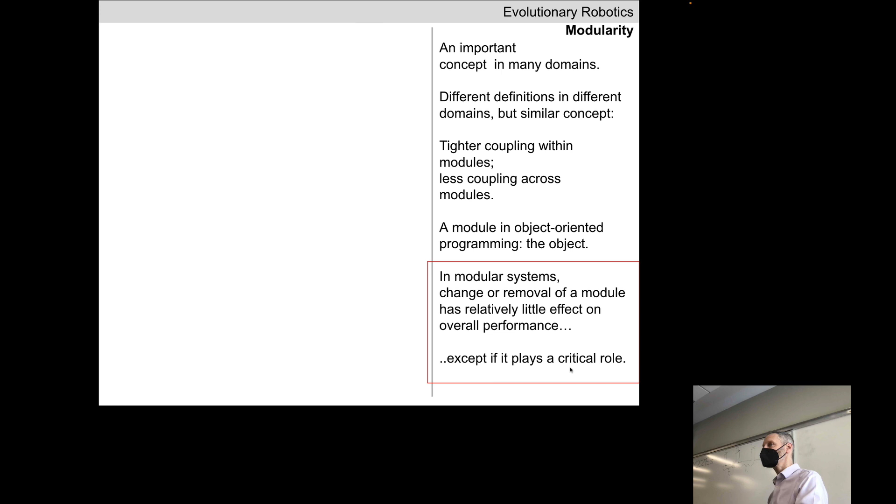The whole challenge in becoming a good programmer is getting really good at object-oriented programming, where you're trying to hide the internal complexity of a given class or class instance from the internal complexity of another component. In your case, hopefully you now have a relatively modular code base where you can easily swap out the hill climber and replace it with a parallel hill climber, then swap that out for a genetic algorithm, and so on.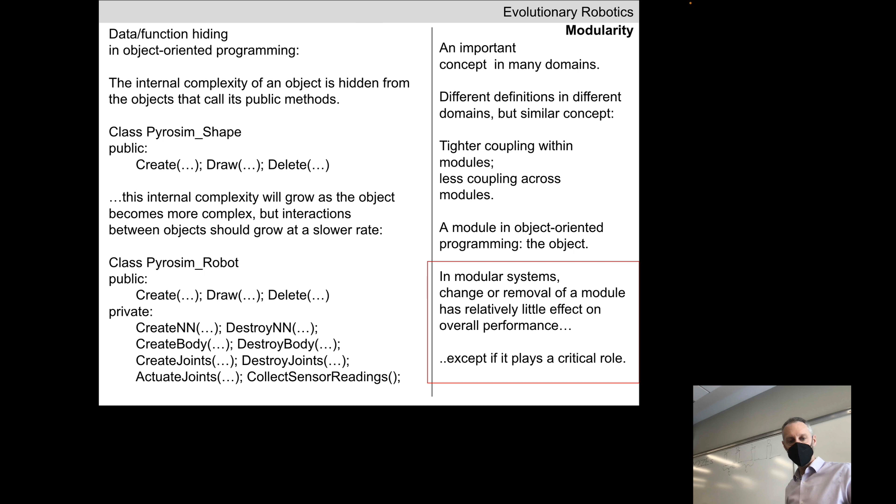Okay, this is some C++ code, not Python code, but you get the idea. Modularity is ubiquitous, it's everywhere. If you take engineering courses, you'll study all aspects of modularity. There are different kinds of modularity, and we've actually talked about these two different types already a few times throughout this course.

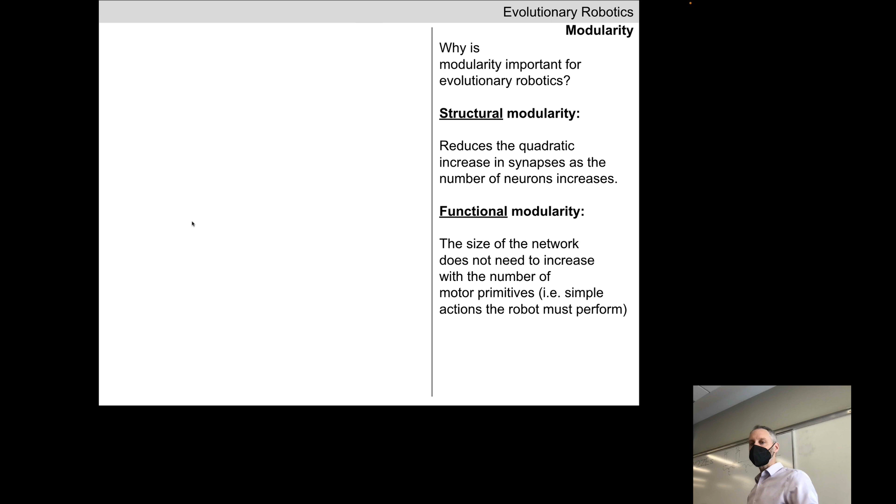Structural modularity is the easier kind to think about. If you think about a neural network, you have a bunch of neurons, and we wire up every neuron to every other neuron — n times n minus 1 synapses. The number of synapses grows quadratically with the number of neurons: if n grows, n squared increases quadratically. That's a non-modular neural network.

When we're trying to design the architecture of a neural network, we're trying to make it more modular — trying not to wire every neuron up to every other neuron.

Functional modularity is a little less obvious. Here we have something that may or may not be structurally modular — it may all be wired up together, but the system can fall into discrete modes or patterns. The pattern inside the network holds for a while, something changes, and it falls into a different discrete pattern, and so on. We saw this with the humanoid robot shaking the block up and down, then left and right, then forward and back — those are 3 different motor primitives. We had a relatively structurally non-modular network, a whole bunch of neurons wired up, but it exhibited functional modularity.

To finish today, I want you to think about neural networks that are structurally modular but not functionally modular, functionally modular but not structurally modular, and so on.